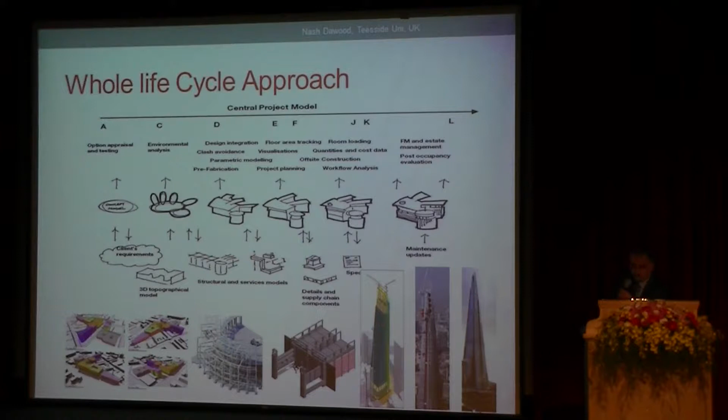Let's elaborate a little bit. We have the top line here, the processes. We have the stages, stage 1, 0 to 7, and these are the main industrial work categories. Every stage will have its own information development, and the idea is how information passes from one stage to another, and how every stage adds value to the process.

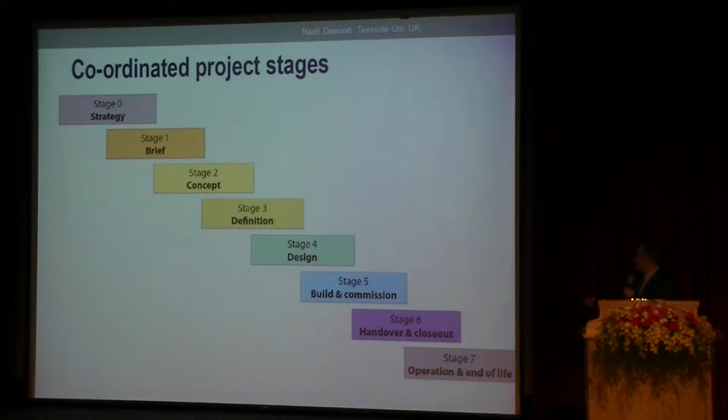If we look at these processes, one of the difficulties we have - I've drawn the term here, the processes and the information value. Our holy grail is the red line. As we move from, let's say, a feasibility study to outline design, we tend to lose a little bit of information when the next step kicks in. All of this is wastage of information. For example, when we start drawing construction drawings, not much of the design drawings are being used, and that's been the difficulty in terms of construction efficiency.

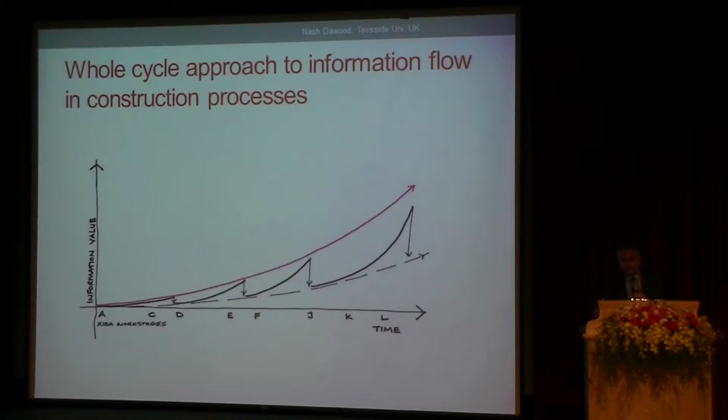So the idea is, can we overtake this? Can we have - our aspiration really is the red line, where once information is created, it's reused, and then we add value as the process goes on. This is one of the overriding criteria that we've been working on.

Coupled with that is the government strategy. The government strategy is about a collaborative 3D model with all project and asset information, documentation, and data being electronic. There are two folds to that. One is the information needs to be in digital format, understandable by machines - 3D project and asset information. The other is this development has to have a whole life cycle approach. Once we create a 3D model at a particular stage, we're not going to throw this model away and redevelop something else. So how can we cater for this? That's part of the technology and part of the processes that we embarked upon.

I'll give you an idea about some of the government strategies alongside these issues that we mandated in 2016. A stage plan was published with a mandated milestone showing measurable progress year on year. 2016 was given as the cutoff date for implementation of some of these strategies, for construction teams, contractors, designers, etc. who want to engage in government-funded projects up to a certain value - at the moment they're talking about 50 million pounds worth of investment in a particular construction. They have to have all these processes approved and certified within the construction team. That is, I would say, the government's holy grail in terms of BIM implementation in the UK.

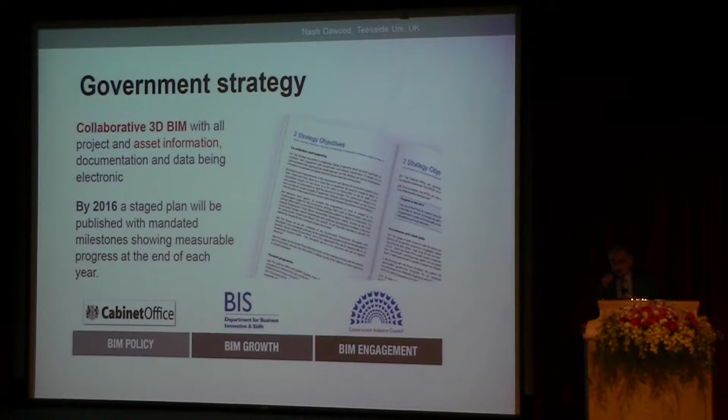Okay, so that is where the strategy is in 2016. I'll take you now through some of the journeys that we've been embarked on. Now, how that's going to be implemented, we've got what we call the 7 pillars of BIM.

There was something called PAS, the Publicly Available Specification, that's been published for information for the capital delivery phases of assets using building information modeling. That's all available free of charge on the internet. This is part of the pillars of BIM implementation.

We've got PAS 1192 part 3, specification for information management for the operation phase of assets using building information modeling. This is similar, but it refers to different phases of the construction.

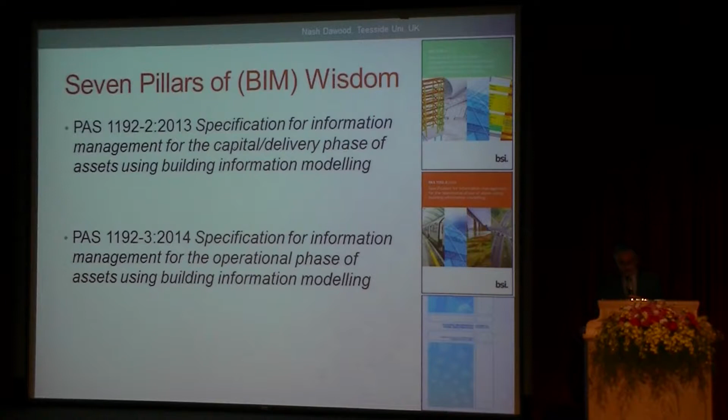The third one is British Standard 1192-4, collaborative production of information part 4, fulfilling requirements for information exchange using COBie. COBie is basically a standard in which information is organized for the benefit of facility management.

I'll come to that in a moment, but these are the pillars. The fourth one is the Building Information Modeling Protocol that's been published.

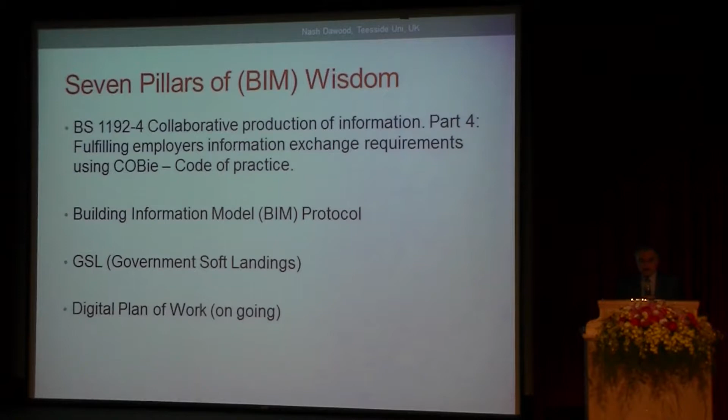Government soft landing is another pillar. I'm going to explain a little bit about soft landing and the digital plan of work and classification. The digital plan of work is ongoing research, and the classification is ongoing, using Uniclass.

The holy grail really is to make everything electronic in terms of the building, 3D models in digital terms, going through all the processes, adding value as you go along, and following all these protocols. The digital plan of work is just being started to be developed by industrial partners, along with the classification.

I'll give you some examples. So basically, this is where the strategy is focused. When you have a strategy, you put in place the way that it's going to be implemented. And the way the strategy is going to be implemented is through these 7 pillars: the PAS standards, the British standard, the Building Information Model Protocol, the government soft landing, digital plan of work, and the classification.

Now, just to elaborate a little bit on why it's being done, before I dive into some of the details. Why is the government interested, why are they pushing it hard? Because the government is investing heavily in the construction sector in terms of infrastructure, buildings, etc. And probably, if savings can be made, which is the business case being approved for the use of the technology and the processes...

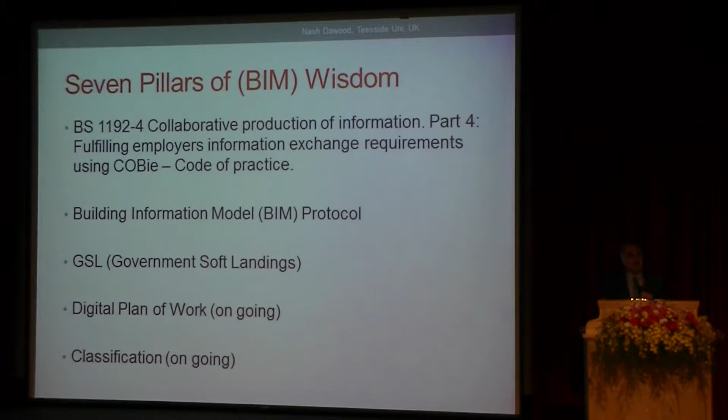So that's where the carbon thing comes in. Just to let you know where things are, it's really 'buy five, get one free' - that is the government's advertisement, if you like, that if we use this technology properly and the processes, we would be able to cut down on costs, so therefore we will get extra facilities free of charge if we build 5 facilities. So that is where the drivers are, and that's where the message is being developed.

So basically, the aspiration, as you can see here, is a 20% capital cost reduction, and obviously a reduction in carbon burden by about 20% by 2016.

And these are big numbers. I mean, imagine 20% with all the rises of prices and things. These are big numbers, but I was talking yesterday and the day before with colleagues, and I think the business case is being made. Yes, these can be delivered. It's not something plucked out of the air, it's not something crazy that isn't going to happen. But things will happen, and that is where the focus on the 20% is.

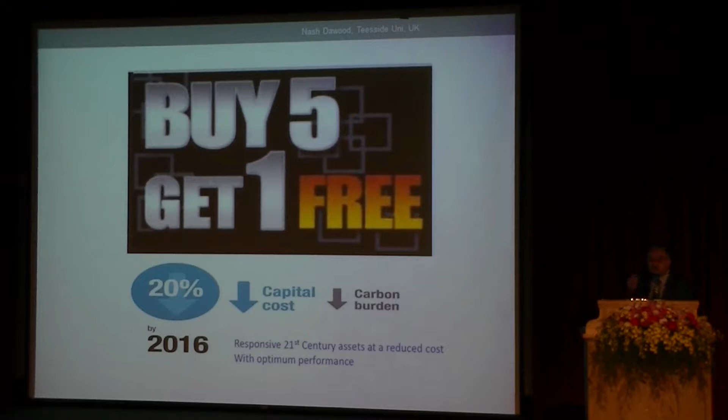The other thing BIM is really doing is transforming the industry from being an analog industry to a digital, training industry towards good quality, consistent data transactions. So basically, we're moving on from an industry that's littered with issues and problems and still run in a very traditional way, into a better industry where we've created infrastructure for a fast-changing global economy. That's where the government is focusing, as well as growing the construction sector to be more into the 21st century in terms of economical value to the nation.

So this is not just in the UK, but even in Europe, there is a European public procurement framework that's been modernised for the sake of BIM implementation, to encourage BIM in public works. There are a number of research projects talking about building information electronic modelling in infrastructure projects, which is roads, bridges, infrastructure. It's not only buildings.

So there's part of the technology, part of the processes. In Europe, and particularly in the UK, we're working on innovation in terms of procurement systems, innovation in terms of the way the building is procured, the way the building is managed as a construction site. So this is a big issue, there's lots of regulations to be changed. But once you start the work, once you start the revolution, things will start to fall into place.

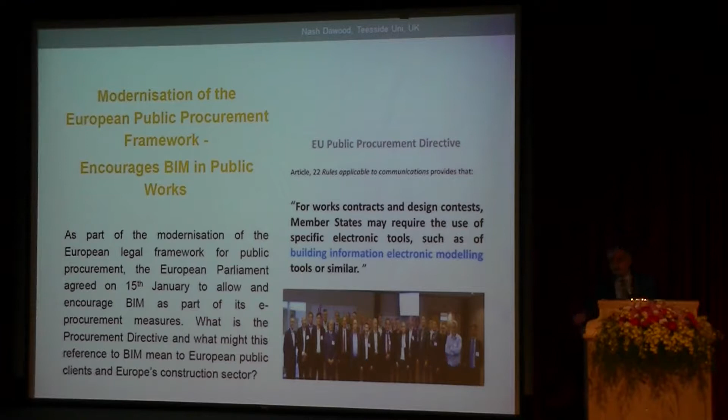Okay, moving on. This is particularly a report produced by the government, which is downloadable as well, with lots of interesting stuff there. It's about construction in 2025. 2025, if you think about it, is in 10 years' time, and we've already got 20% targeted in 2016. For 2025, as you can see, the target is massive really: 33% lower cost in construction, 50% faster delivery, 50% lower emission, and 50% improvement in exports. The aspiration in the UK is that the construction industry will be exported in terms of knowledge, understanding, and services.

So these are the numbers, as you can see, they're massive, they're big. And really, as UK PLC, as the government, they're putting the resources in order to innovate, in order to move beyond the current state of the art. I mean, you'd probably agree these are quite massive targets to reach, but that's the way things are happening. For example, if your bridge is built with 50% cut in time, you know how much this will mean for citizens, how much this will benefit the people using the facilities. It's a transformation, and it could happen.

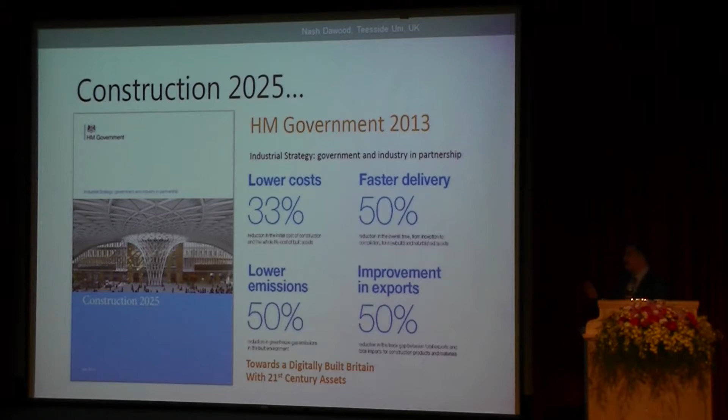Okay, so coming to level 2 BIM, this is where, in 2016, the UK mandate is to implement BIM, as you can see here. Level 2 is about a managed 3D environment using separate disciplines and tools with attached data and integration of commercial data. So that's where we are here. This is level 3, the aspiration.

I think level 3 is moving beyond. This is where the 33% can be delivered, this is where the 50% of the time can be saved. That's the aspiration that we have. As you can see, we started from zero here, where there's lots of companies still working in 2D or even 3D, but there's lots of preparation going on in terms of how to embrace the technology and embrace the process.

We say embrace, but this is hard work. You're changing the way that you work, changing the culture within your organization and within your supply chain - it's massive undertaking. But companies are starting to embark on this particular path with some support from government.

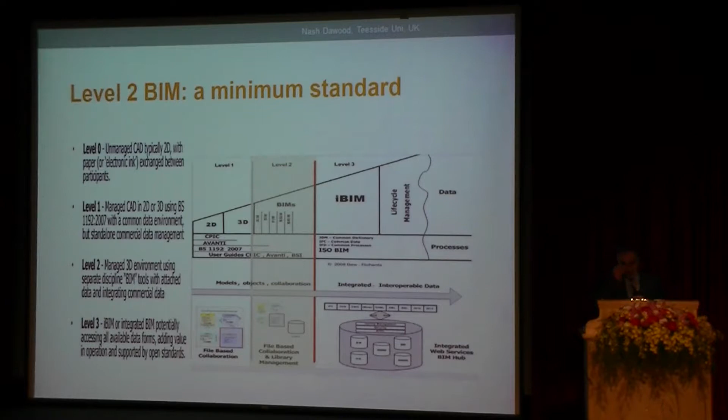We have very big small medium enterprises - you've got the big contractors, the big consulting engineers like Atkins and others, but we have a massive amount of small medium enterprises. Unless they are on board, nothing will happen. So that's where we're focusing as well, and government and ourselves as a research community have been working hard with these sort of people to innovate and get them started on the road towards level 2.

If you wanted to know more about level 2 and the processes, there's a massive amount of documentation freely available on the internet about what sort of standards need to be used. But the 7 pillars that I showed you is the core foundation for companies that will be able to innovate - these are the 7 pillars I've shown through the passes, PAS 1192, the standard in different versions 1, 2, 3, and the digital plan of work and Uniclass. Uniclass is the classification of products and services that can be captured electronically.

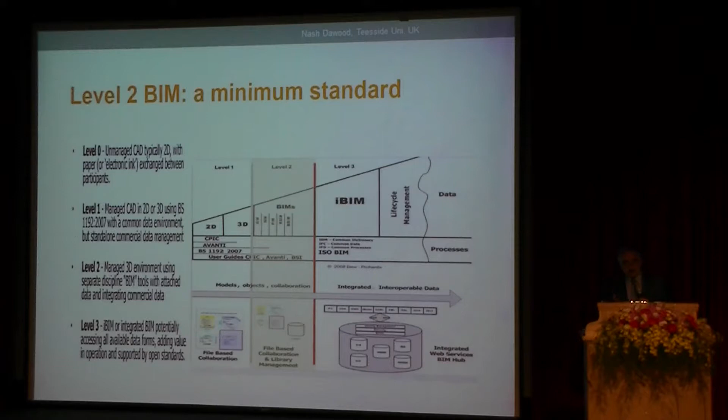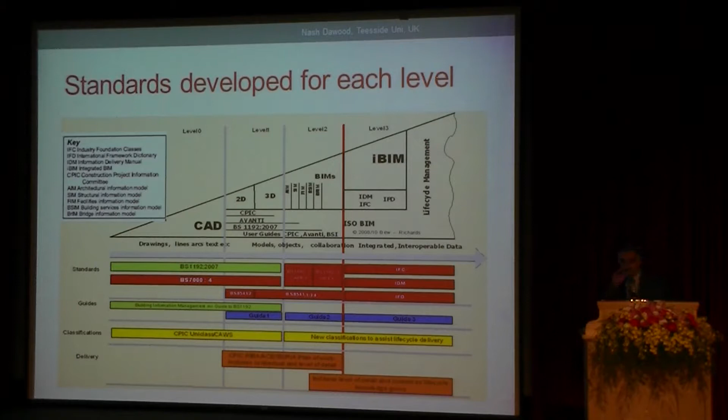More elaboration on this - this is level 2, and these are the different standards and guidelines for how this is going to be used. It's about collaboration, it's about objects. At the heart of it is the whole life cycle of your information and how you interact, work and collaborate with your partners and the construction team.

So that is some of the level 2 BIM standards. This is the minimum requirement when you have shared data, and this shared data will be able to serve different clients or different supply chain - the surveying, the construction team, the operation team, and some sort of sales services.

It's quite an exciting time, particularly for me personally - I've been working on this for the last 20, 25 years, looking at different ways of the construction process, different ways we can innovate with information technology at the heart of the work. This excitement is coming to be. The challenge is massive now - the impact, how we're going to demonstrate some of this research output that can come to be working.

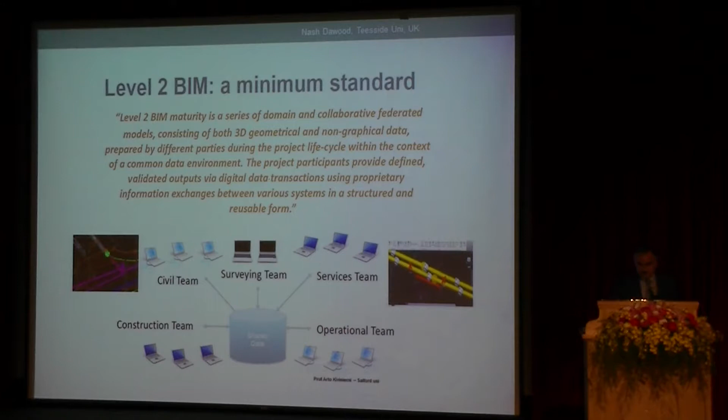So another concept of BIM is about classification and indexing. We're moving really from relational databases down to the future, down to spatial mapping and 3D dynamic models. This is the holy grail in terms of BIM - not all the data lives in a 3D model. We don't want what we call infobesity - we want lighter systems and a lighter way in which data are connected.

This is a massive challenge now to the research community - how do we make this happen? We don't want to create rather massive data in 3D models, which takes ages to articulate and draw information. We want more agile data structures that are easier to interact with, easier to develop, and easier to interface.

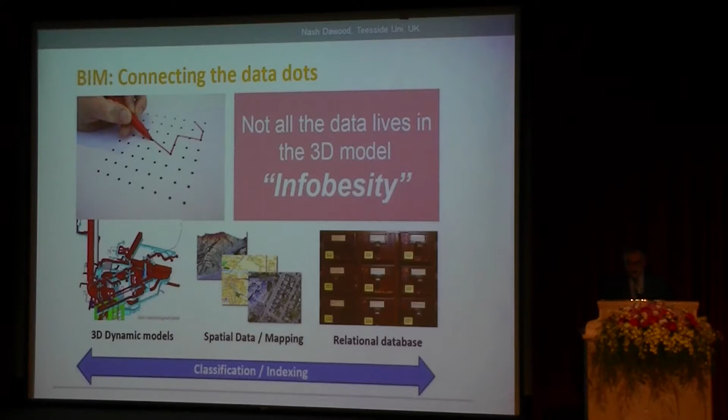This is where level 2 resolves the methodology - working in a 3D environment, creating structured non-graphical data, data verification, data exchanges, working in a common data environment, connecting CapEx and OpEx, and creating a solid platform for level 3. I'll elaborate a little bit on the CapEx here.

CapEx and OpEx - that might be interesting for government departments, particularly the Deputy Mayor of Queensland - is how we start to integrate the operational cost and the capital cost, how we integrate those together, how we think about the operation cost when we set the budget of the construction project. So integration predominantly of CapEx, the capital expenditure, with OpEx, the operational expenditure.

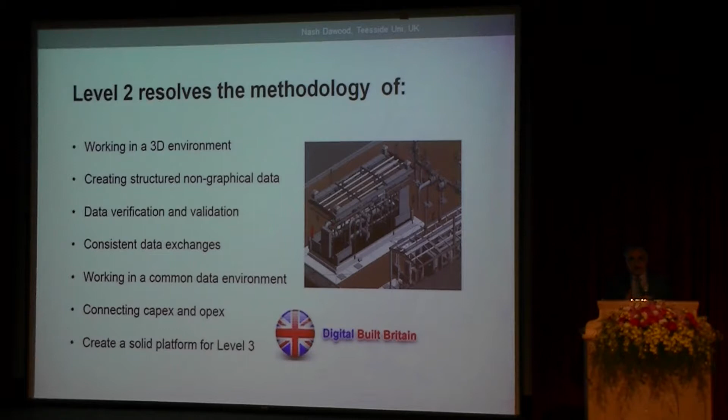It's a big issue now in the UK as well, which is paving the way for level 3. So basically, as we try to implement level 2, the research communities and the government departments are paving the way of innovation for level 3.

So basically, this is some of the issues that we do here. It's in the print of the outlines in your documentation.

So basically, we're moving into how we're going to operate an agreed standard, defined information requirement, as you can see here, and we're starting from capability to deliver, going to defined information, and that is part of the standard that we need to do. At the heart of the implementation of BIM is not about how the contractor is going to stage information, it's about what the client needs for these facilities to run effectively and efficiently. That's part of the heart of BS 1192, the capability to deliver one, and then moving into defined information requirement, and then right to use the data, and then it moves up to data exchanges, etc.

And this is where we have the defined processes. So that's government applications in terms of how we're going to procure using BIM. So when we go and help companies, particularly SMEs, to be ready for 2016, these are some of the work that we do, to see whether they have enough expertise and sufficient knowledge about all of these protocols, all of these ways in which information is going to be exchanged. Do they have the facilities? Do they have the systems? Do they have access to the server? And that's the way things are going.

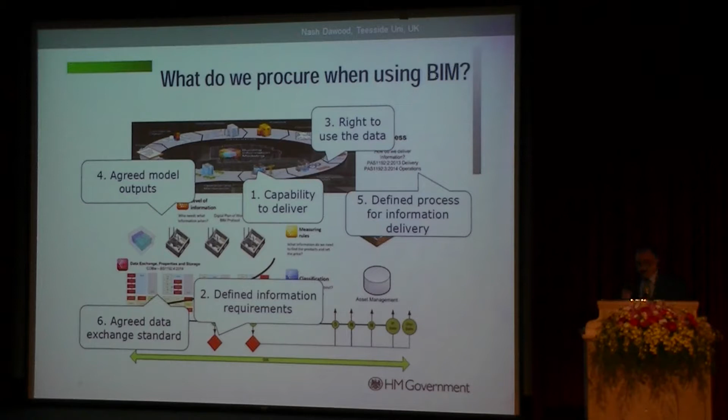Obviously, this one here is at the heart of the British Standard 1192. It's available now, particularly the new version, BS 1192:4, which has just been issued in 2014, which is a collaborative production of information, code of practice, and the British Standard 1192 is particularly applicable where technology-enabled processes are used to support projects.

So basically, my advice to nations embarking on this particular journey in terms of BIM, is that the process really needs to be looked at properly, and some of these lessons and experiences can be looked at to see what's good for a particular nation to adopt in its BIM strategy.

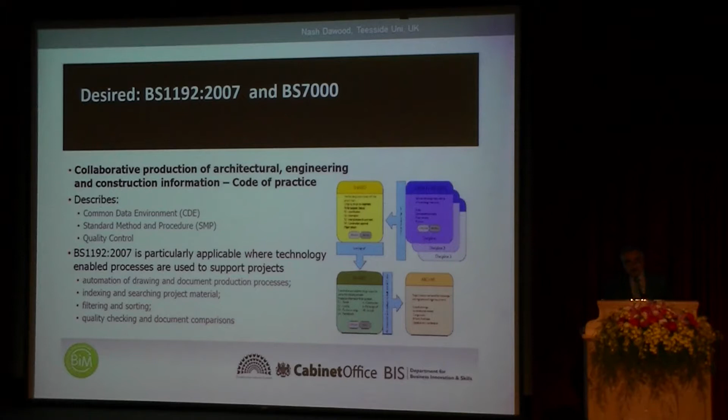So that is some of the government cabinet office work. This is how the preparation for the implementation works. So you have a process that is being developed well using some of the standards. There's other documentation that's been produced, which is the PAS 1192, information lifecycle management, and you can have a look at this information. It's all available free of charge, and this will give you a flavour of where things are.

So basically we now have, if you like, the blueprint of how we're going to implement this strategy. We've got documentation and standards for different phases of the project - for example, PAS 1192 is about information lifecycle management. The government is not intervening in terms of the technology. They're not saying you shall use such technology - that's not their problem, they're not intervening in what sort of exchange we're going to use. This is for the industry and the community to decide. But what they're deciding on is how we're going to conduct things, what process is going to be used, and how information lifecycle is going to be managed.

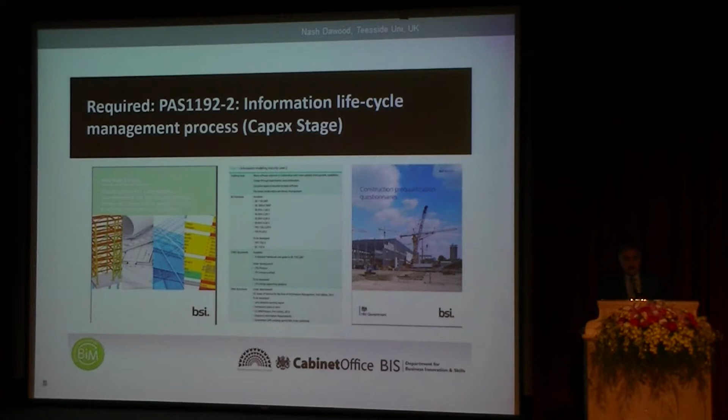So this is some of the current protocols. If you go to the actual protocols, there's lots of explanation, lots of elaboration.

But if I can take them just quickly, these are the processes that I showed you: one, two, three, four, five, six, seven. This is initiation. This is design. This is detailed design. This is construction, or detailed construction drawings. This is construction, commissioning, and facility management. As you can see here, there's lots of exchange of information.

But at the heart of this protocol is this: employer information requirement. Employer information requirement is where the client is served. Now, the client has a major role to play in this, so that's where the information requirement comes in, and then comes the procurement, and then delivery, and then you start to look at what you're going to build, how you're going to build it, and you can see the information keeps mushrooming, bigger and bigger as time progresses.

So the holy grail really, as we progress - as I showed you early on - is that as things are being developed, there's no waste of information. So a process will add value to the next process, and that process will add value to the next process. The other thing, which some researchers here might have been working on for a long time, is that we sort of worked on the belief that everything lives in the 3D model.

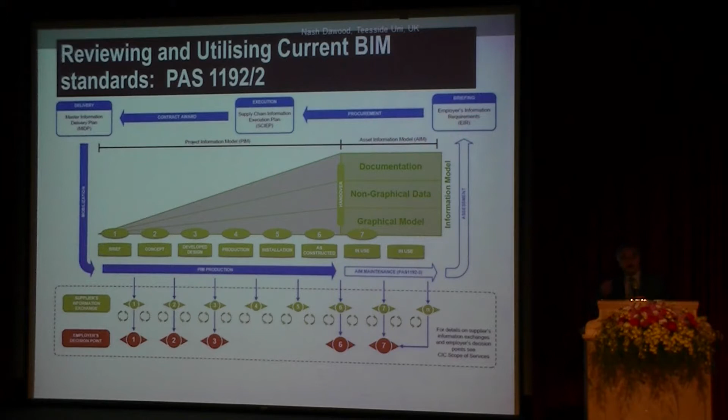As I said, that's now become a good standard. The briefing here becomes supply chain information, and then becomes the way that information is organized and delivered - you can say delivery, master information - and then you start working on the project. It's a revolution: you put at the heart of everything what the client is going to do with the building and how it's going to be run, and then you start to put the blueprint for the processes.

This is another image of the past, similar, but this is where things are going to be. In the briefing: what information do I need, in what format, in the next stages can my supply chain supply it, how is delivery of this information handled, and then it becomes design, construction, and operate.

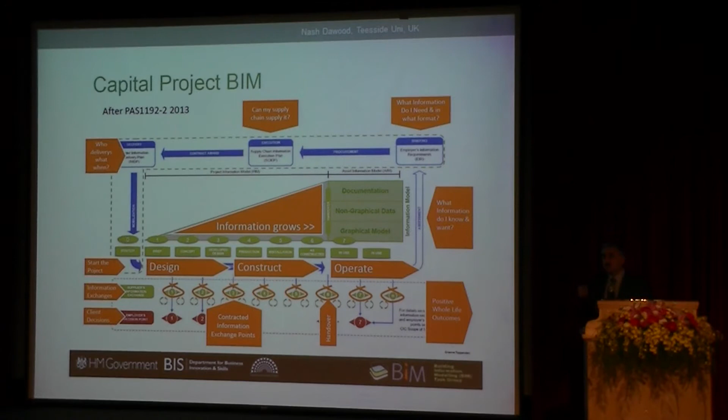And there's a big thing here as far as the government is concerned. This is where people are going to live in the building for about 30, 40 years, and how the information is going to be made available, and how I'm going to make sure the building is built to operate properly, so that the business within the building thrives and makes a contribution to the economy. So it's all a holistic approach to the thinking process.

Okay, the other thing I wanted to elaborate on is government soft landings. As you can imagine, if you're building a mass amount of assets as government, you really want to make sure that once you have the keys, you have information about the operation, about the way the building is going to behave, because what is designed might not be reflected in how the building is going to run. So there's lots of corrective action needed as time progresses.

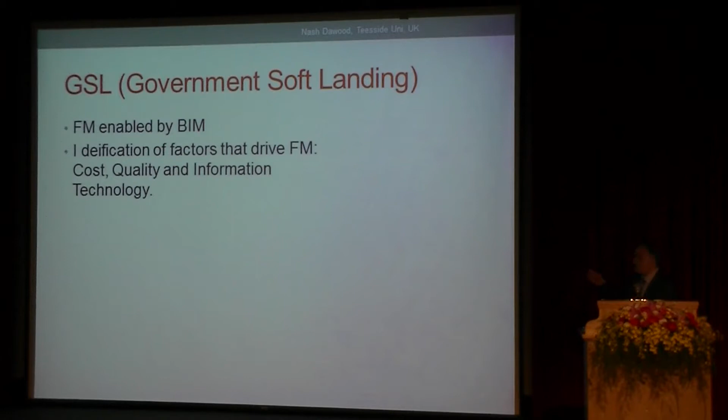So government soft landing is massive for facility management. It's about the facility enabled by BIM. It's about identification of factors that drive FM, cost, quality, and information technology. And this is one of the main pillars of BIM implementation - government soft landing.

And then three levels were identified: the strategic level, key planning stages; the tactical level; and the operational level. Some of this information has to be identified at the very early stages of project identification, even before it's built - what I'm going to get, what I'm going to maintain, what sort of materials I'm going to use, what whole life cycle approach I'm going to use, etc.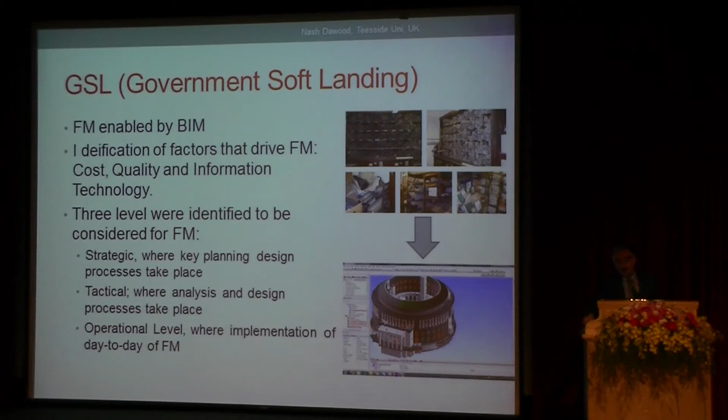It's not about whether I'm going to save 1 or 2% in terms of the construction cost, but how much profit I'm going to make out of this particular building, or this particular bridge, or this particular road once it's built. So that's the government soft landing.

This is the digital plan of work. Digital plan of work really is the sort of thing I showed you earlier in terms of the processes - that's the project processes, these are the processes, and how information is exchanged electronically from one process to another.

So that's big work that's been done now in the UK, is the way in which information is transferred, using levels of detail from 100 to 500 as you go through the process. This is something that's going to become available sometime next year, before 2016.

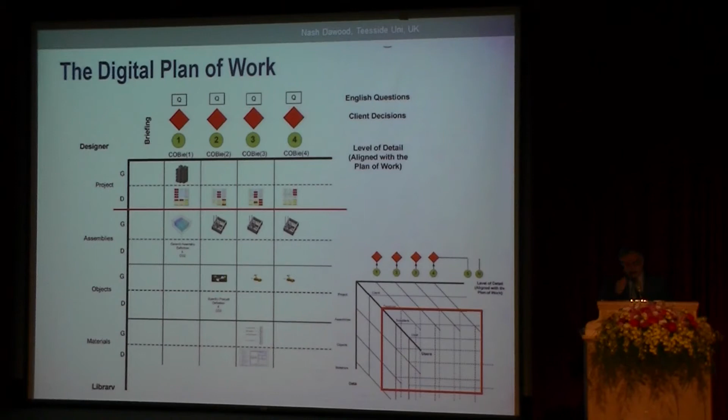So you can see examples of the digital plan of work, these are the processes I showed you, from brief, concept, definition, design, and this is how information is going to be generated and sustained or handled electronically from one place to another. And then the same concept applies across the whole life cycle, how every process is going to add value to the next process, rather than creating the models again and again.

I've been working on a number of projects where we had to create the model maybe 5 times: one for outline design, one for detailed design, one for construction particularly if we want to run 4D, 5D modeling, and one to communicate with the foreman on site. So we needed to make sure this wastage is minimized, through this part of the digital plan of work.

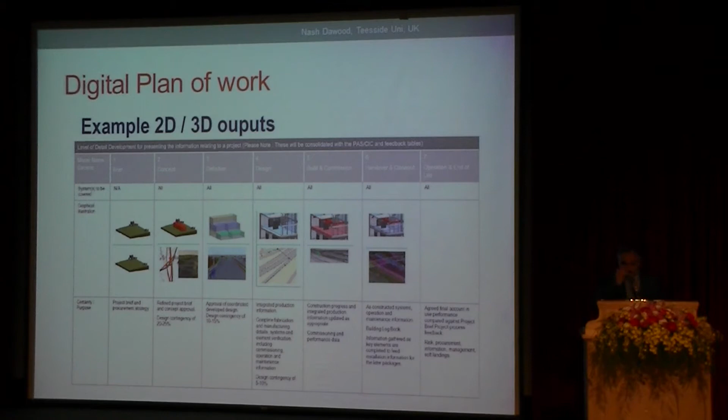Okay, so the other thing is Uniclass classification, which is classification of products and services. This is being done by the Royal Institute of Chartered Surveyors now, and as you can see here, the classification is almost in the process of being finalized.

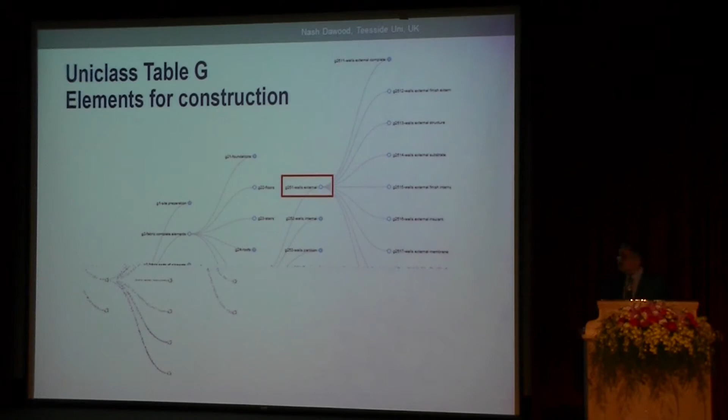So you pick up - you might not see that well, but it doesn't matter really - you can pick up on any of these electronically, and it will tell you what the price is, what the model for this particular object will look like, and that's the classification we're pursuing as part of the digital plan.

Okay, so basically I'm almost there. Just to give you an idea about the information data growth, starting from 0, these are the plan of work stages 1, 2, 3. As you can see, there's massive growth in terms of data up to basically construction, and then you manage the information - a massive amount of information here that needs to be managed. So basically the whole Holy Grail is about how this information is kept, managed, and processed properly for the sake of achieving the targets we've set, about 20% cost reduction.

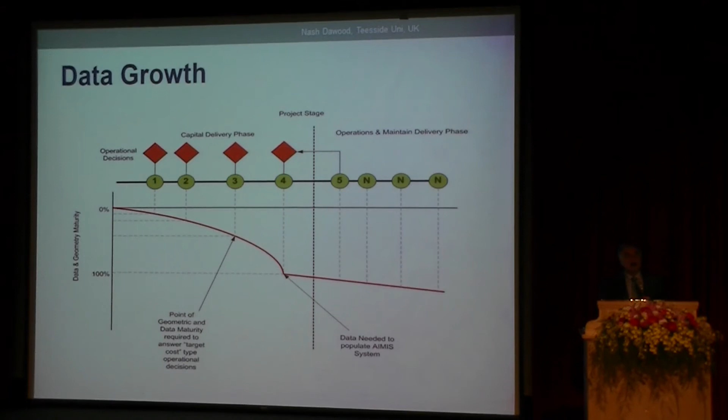Okay, so that's part of the core as well that we said we're going to talk about - it's about information exchange to facilitate digital transactions. It's part of the government soft landings. It's the protocol being used, called COBie, and it's basically information that is on drawings, information on construction processes, etc., that can be captured and used to run the facilities, and this is part of government soft landings.

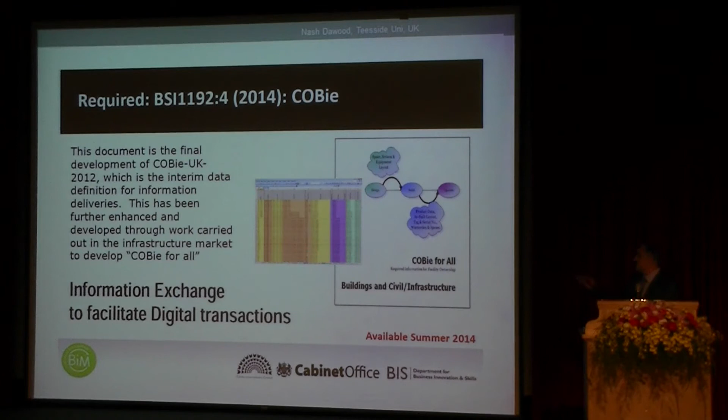They wanted to use certain standards. COBie is one of the standards being used, which is really about information exchange to facilitate digital transactions. So you have all the information captured in a digital format, and it's as easy as spreadsheets - different spreadsheets that we call a schedule of rooms. If you think here, there's the lighting, there are the chairs, all this information about the assets can be captured. So therefore, when you do maintenance, when you do search, when you want to calculate the number of postings for maintenance, it all becomes readily available information.

Okay, this is another piece of documentation you might be interested to look at - it's a digital tool for information modeling. This is about the technology, and it might be interesting - you see this will be delivered through libraries and data delivery. There's a big market now.

I'm not quite sure whether it started the process here, but I would like to hear from you in terms of building digital libraries of objects. I'm a manufacturer of doors, a manufacturer of chairs, a manufacturer of certain types of staircases, maybe certain types of windows. I would make my products available digitally so they can be captured by designers and inserted into their design. That's a massive growing business now in the UK, speeding up the process of developing the spec and developing the drawings.

For industry, like the supply chain manufacturers and product specifiers, they're investing in this, so therefore architects might use their products, and therefore there will be somebody going to purchase their products. So there is a massive growth in this area about digital libraries, and I can see most of the major manufacturers putting their products online, modeled in certain ways.

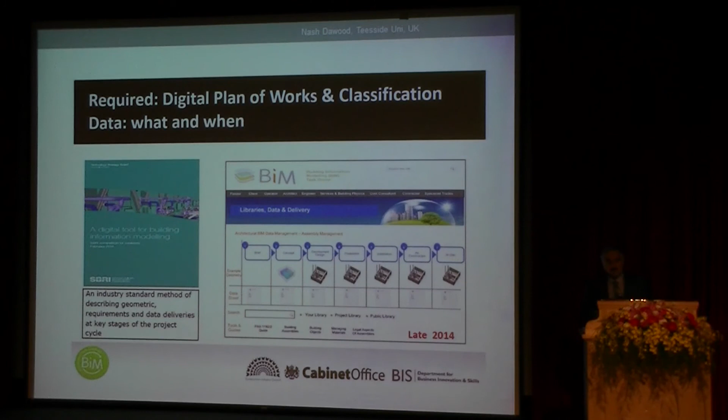So basically that is level 2, but as aspiration, we're moving into level 3 and perhaps level 4. At the moment, level 3 is out on the horizon. Level 4 is about all the integration of how the building is going to run - this is where the CapEx and OpEx are going to be integrated. At level 3 you're thinking a little more; at level 2 we think about how facilities run. But level 3 will go further with more costing analysis around operation cost as opposed to capital cost investment.

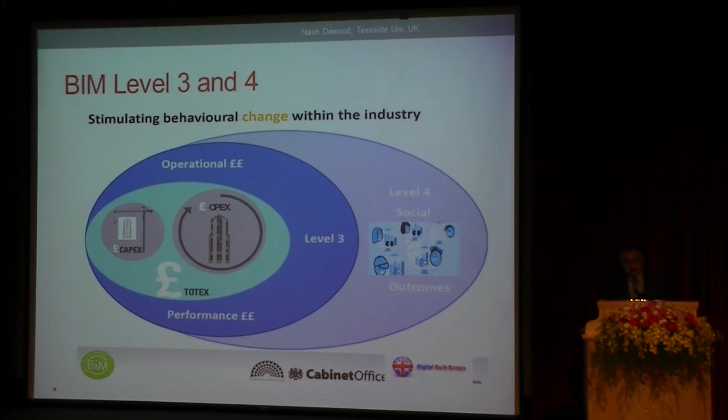Because at the end of the day, we wanted to look holistically at the whole cost, from the start of the design down to the decommissioning of the facilities. So basically, in this construction process, that's where level 3 is going to have more impact. Level 4 is mostly our aspiration to look at the social issues and interactivity. Once the digital information becomes available, we might be able to use it in different ways, particularly the social aspect, in terms of productivity and how people can integrate in the building.

And there are lots of plans. Once the building is being procured, there will be measures. The other thing is the business case has been made - there is no going back. The business case has been made, and there is suggested saving as well in certain projects beyond the 20%. They said it's 30%, including delivery and efficient running of facilities.

The main ingredient of any successful work is the SMEs. If you wanted to have a successful strategy for implementation, you need to enable those people who actually do the work, not those who manage it, not those who carry the risk - those people who are actually doing it. When I mean risk, it's financial risk in terms of the big project management companies. The SMEs started adopting BIM, and we have something called BIM for SME - a big initiative funded by the UK that will enable regional development, regional nurturing of SMEs and their BIM capabilities.